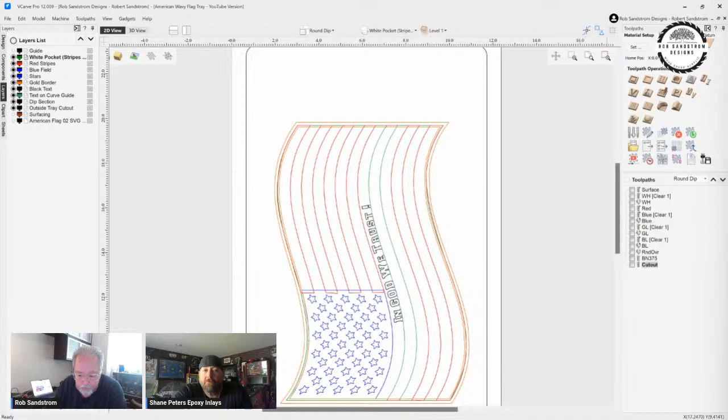Okay, let's start that discussion again. Can you see it now? Yep, all right. I don't have it up anywhere else, but it says my screen sharing. And then let's set up this screen share so that we're both in there. Oh, this is the one I was looking for.

All right, so I wanted to talk about the overlap strategy again, and thanks for letting us know. So the key is that I wanted to talk about where we need overlap and where we don't.

So the first pour, I'm going to get probably easier if I take these all off right now. So the first pour I set up was white epoxy, and then we're going to cut the red out from all that. I'm not going to go through all of this because we did that last week, but there was a question about overlap, and I wanted to reemphasize the overlap concept.

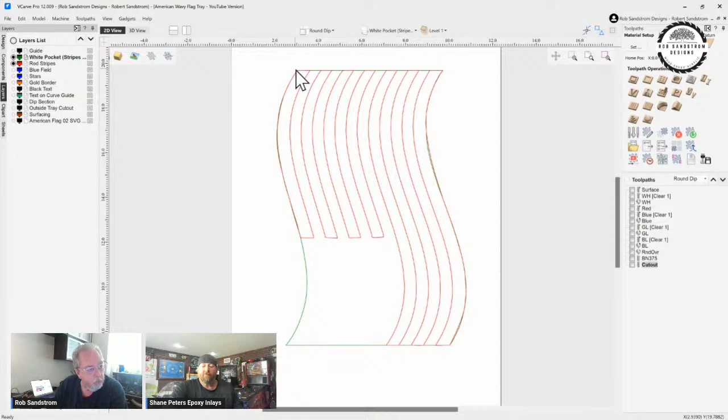So the first thing we needed to overlap is we need to make sure that when we put in the red stripes, that we go all the way out to the end or close to the end of the white. I'll explain that in a minute. So we made all of that come out in this direction because we were going to overlap the red stripes and the white with this gold border that I just turned on. So hopefully you can see we were going to overlap there.

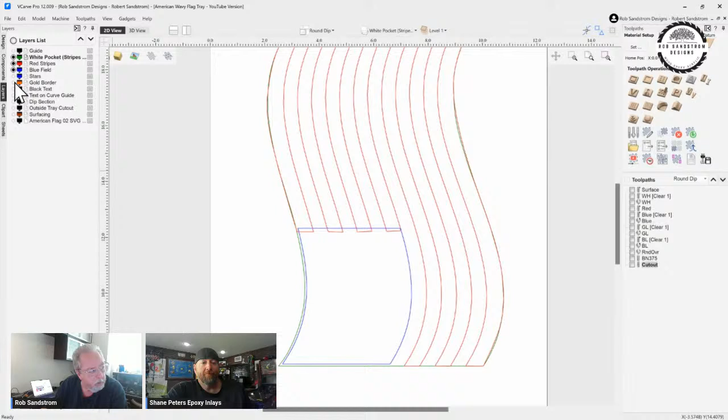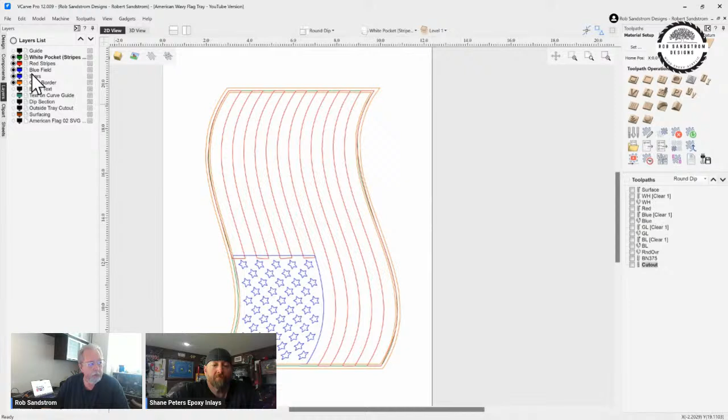And then we put in our stars and did all of the other stuff. So I'm not going to go over all the layers again, but I wanted to point out where we had the key interfaces for overlap. And I think one of the questions that got brought up in this discussion is why do we need overlap and how much?

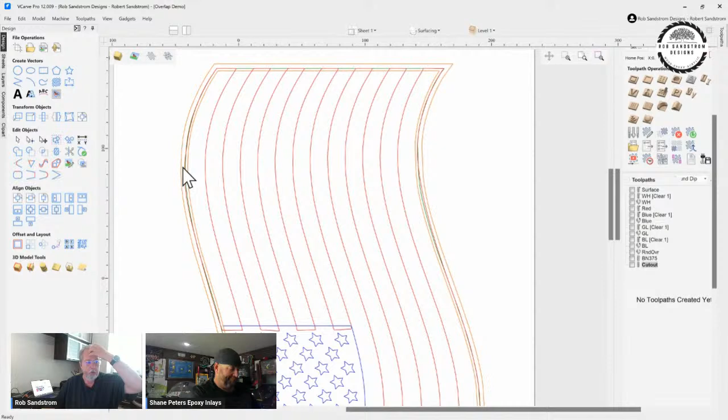And so in that video, I went in there to explain that, but I thought it might be good if I opened up a demo file that Shane and I had done once before a couple years ago. Let me explain what you see here. So this is a 2D view.

And in this view, in this area, these are 15-degree V-bits. So I could probably put down here 15-degree V-bits. And let me shrink that down. Hit close.

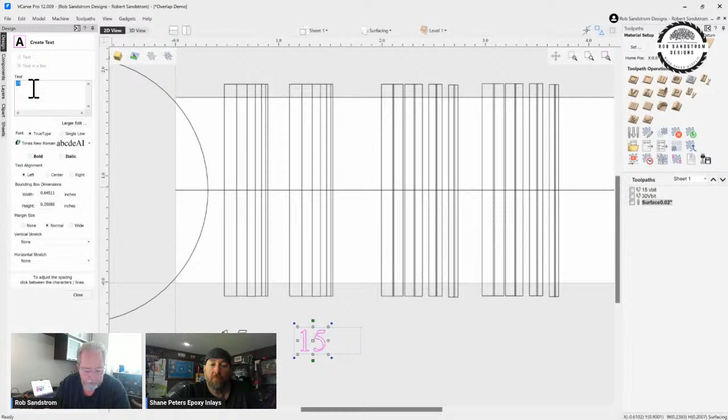And over here, I'm going to hit Control while I move, so that will duplicate it. This is going to be a 30-degree V-bit. Hit close. And so now...

Again, if we take and we go to move this and I hit the Control key and bring it over, it'll duplicate it over here. It's just so we have it. So what you see here is we got a 15-degree and a 30-degree V-bit.

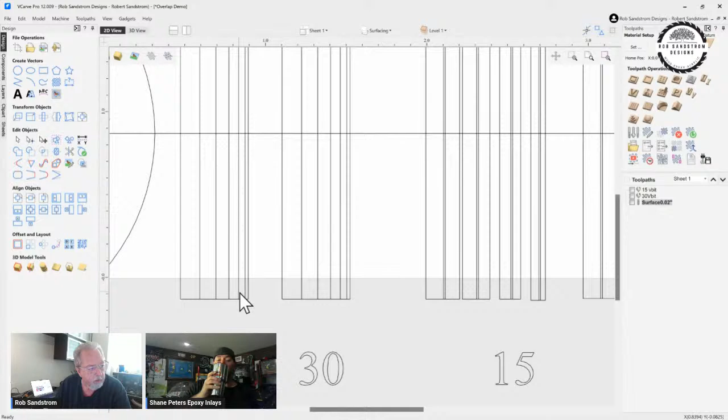And in this version, you can see that each of these vectors starts at 0.02, 0.04, 0.06, 0.08, 0.1, and 0.12 are the sizes of those vectors. And there's no overlap between any of those vectors.

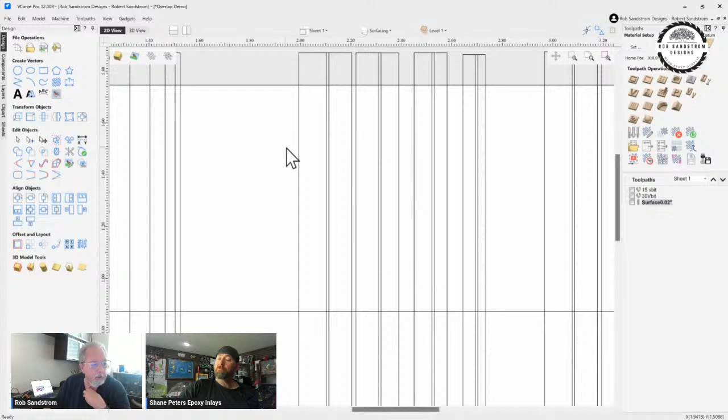Now, if you come over to the other side, what I've done is I put in 0.01 inches overlap. That's a little more than what I had in the video, but I wanted to show it a little bit better. So these are each 0.01. And of course, there's a bigger space right here between these two vectors. I just didn't want them to be piling on top of each other.

So if I come over here and I go to the 3D mode, and we look at it in this direction, I'm going to go ahead and use a 15-degree and a 30-degree V-bit, and I'm going to run those tool paths and show you what it looks like on the side.

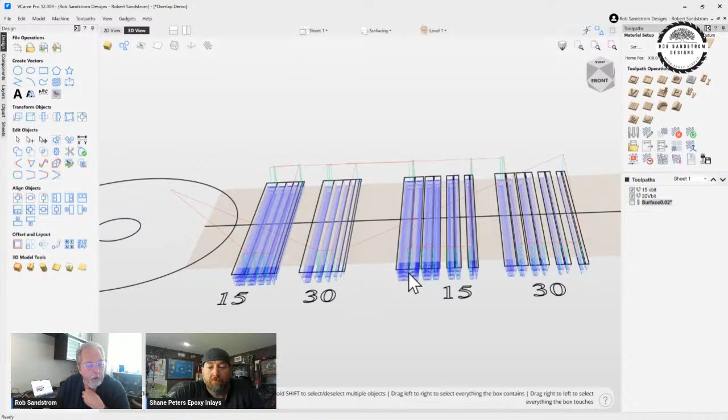And this is where my Mac would have bogged down. It would have taken forever to do that part that I need to work on.

So what I want to point out is the overlap we're talking about. If you look at the 15-degree V-bit on the ones where there was no overlap at all, you can see this peak rises all the way to the top here. And over here, it also rises all the way to the top. And anything under this peak here is wood or epoxy, whatever was underneath there.

If you come over to the ones where we have overlap of 0.01, you can actually see that the peak is lower than the surface of the wood, which means there's less of a mountain here.

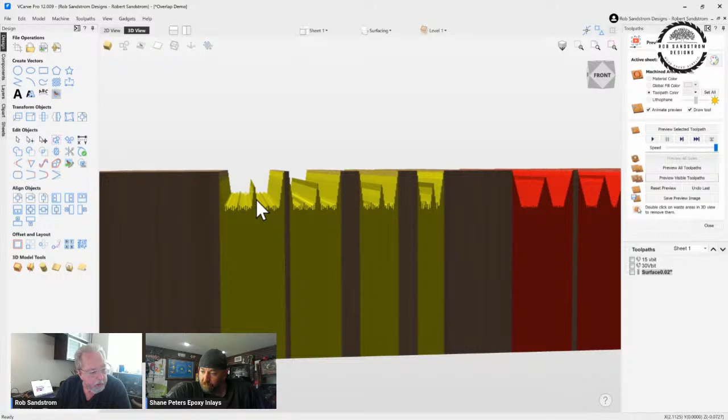And the same for each of these as we go through for the 15-degree bit, and this is the 30-degree bit. So it's much less of a problem with a 15-degree bit than it is with a 30-degree bit, and that's why Shane and I tend to lean towards 15-degree bits, especially if you're going to get into small vectors.

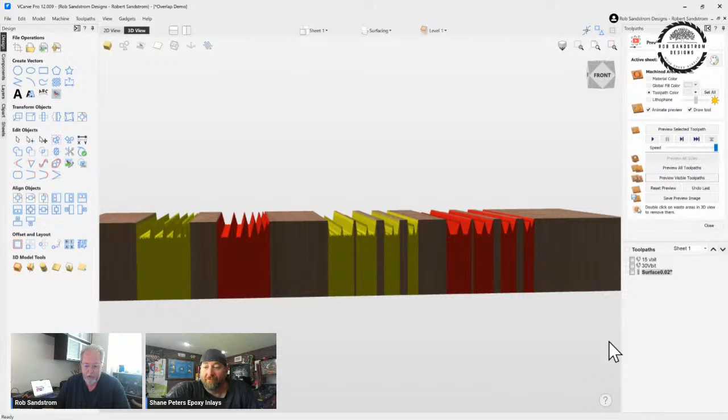So now let me show you what happens if I surface this thing at 0.02 inches, recognizing that that's 0.5 millimeter. So it's not unreasonable to plan on taking off 0.5 to 1 to 1.5 millimeters off the surface to get all your epoxy surfaced off.

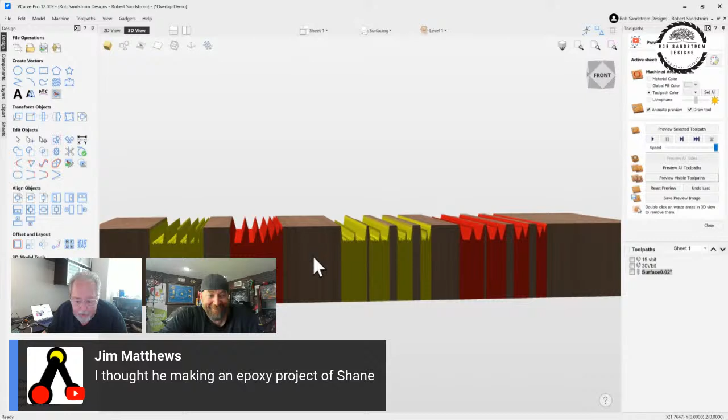I just saw a comment. I thought he was making an epoxy project of Shane. Okay, so I must have pointed to something weird. So I'm pointing on my screen and I can't see Shane. I can see where your screen is. That's weird. How come it's doing that?

All right, so let's go ahead and run that surfacing path. Rob, just so you know, I think he was talking about earlier when you weren't sharing your screen, but you were describing it like here to here to here to here. So I thought he meant because I was pointing here and on the screen. No, I think it was just earlier, but maybe not.

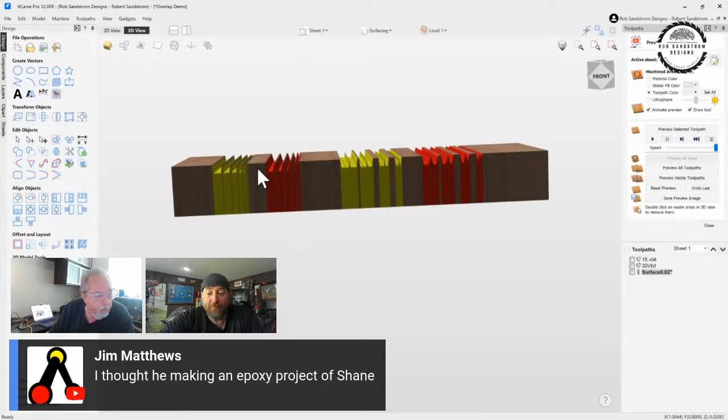All right, so I just ran the milling path, and I want you to look at what happens at the top of these mountains. Assuming this is wood underneath, the 15-degree, it's not as big a deal.

But if I go down any more, you're really going to see wood there. And in the 30-degree, look at how you see the wood already popping through those vectors. So if you put those vectors right on top of each other and you mill down a full millimeter, you're going to have wood exposed between the two of them, or you're going to have clear epoxy or whatever was underneath.

If you go over here to 0.01, you can see that your opportunity - now these don't count because these are intentional spaces - you're not going to have the underlying epoxy popping through. So that is, with a 15-degree, you're really safe.

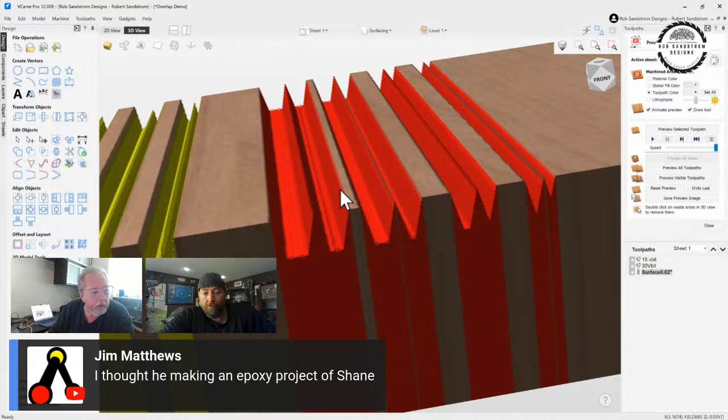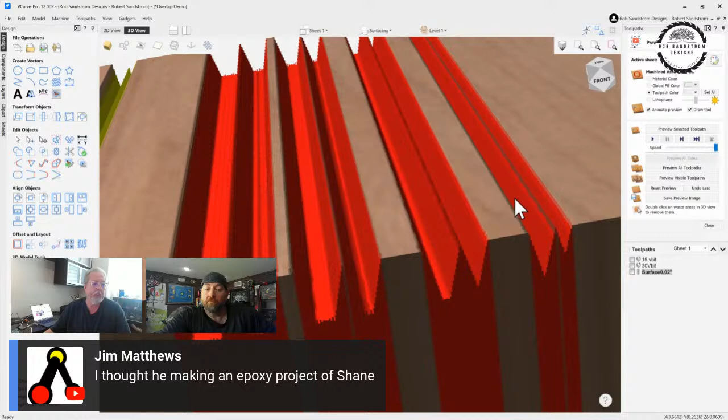And if you go over to a 30-degree bit, you're probably pretty good, although you're getting close on a couple of these. So you may really want to have more overlap, meaning the vectors are overlapped more. Shane normally recommends about 0.05 if you can do it, but anywhere between 0.02 to 0.05 I've found to not give me much problems, especially if I used a clear coat underneath it. So I just wanted to take a minute to go through the actual overlap demo here in case anybody's still struggling with the concept of overlap.

So there we go. Any questions? Or with that, Shane, do you have anything to add or tell me where I'm hosed up? So you did this demo with a 0.01? Yeah, not a 0.1, 0.01. Okay.

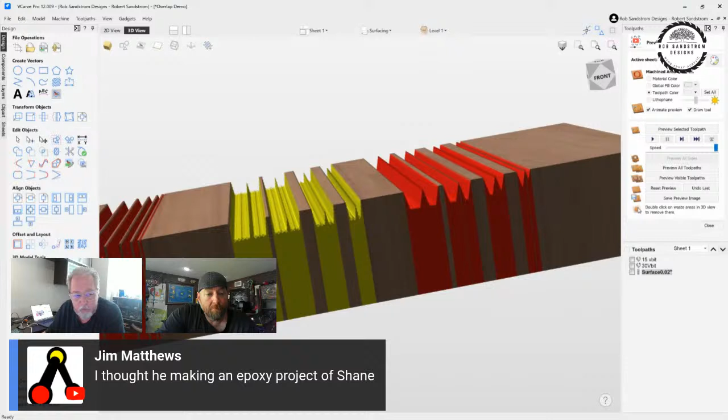And we can see that if we go to these vectors, if we measure it right here and we look between the two vectors right here, right there, you can see 0.01 up there on the left top. So I did that with a 0.01 and we were safe.

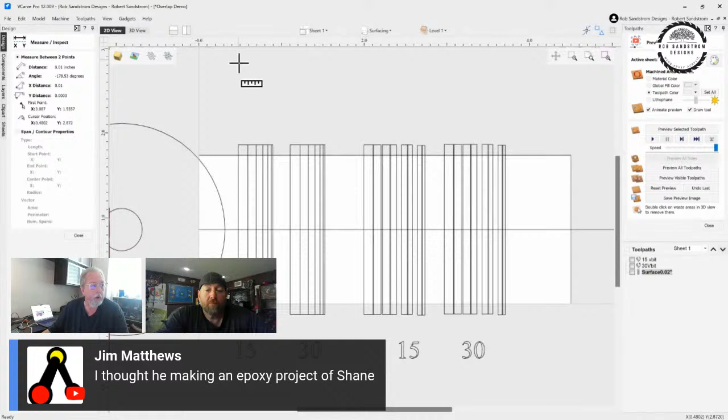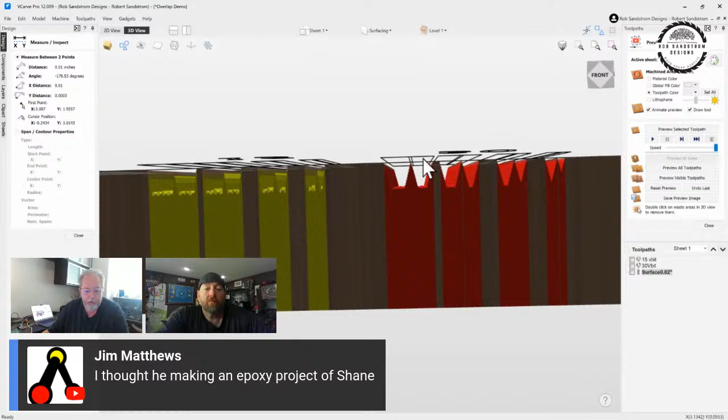The other thing I think probably to look at on this, if I turn on the vectors, you can actually see, if I get just the right angle, this is the height of the actual real surface before I surfaced it. So you can see how far down we went on the view and how the mountaintops can start to get wider and wider as you come down there, meaning they're flattening out and you're seeing them through the epoxy.

And what is that measurement between the original surface and what you did there? How much did you take off with the surfacing bit? What's that distance between this? This is 0.5 millimeter. Okay, 0.02 inches. So I normally overlap at least 0.03, but if I'm in a really tight area, I might go down to 0.02 inches.

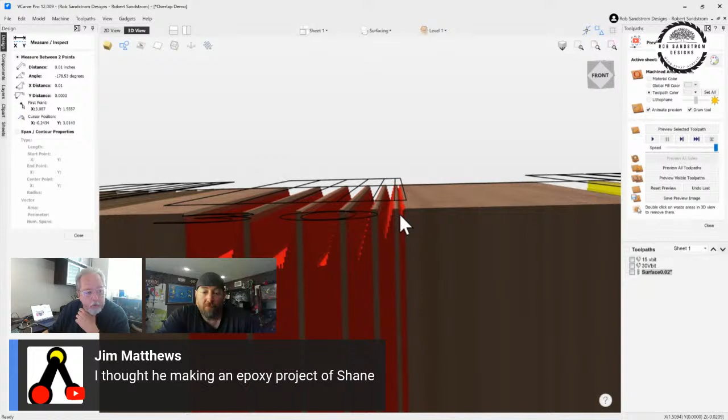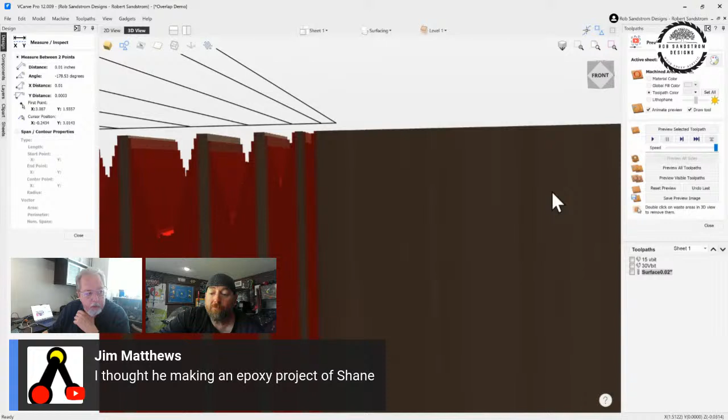So the other thing you have to deal with is the depth of the V-carve. If you're using a 30-degree V-bit, and we looked at this first vector of 0.02, look at that, it almost completely disappeared. That's with a 15-degree V-bit. Let's look at a 30-degree V-bit. It did disappear, you can't even see it anymore. Excuse me, I got that confused. This is a 30-degree V-bit, and this is a 15-degree V-bit with no overlap. You can see how deep it went. By the time you milled it, you've only got that little sliver.

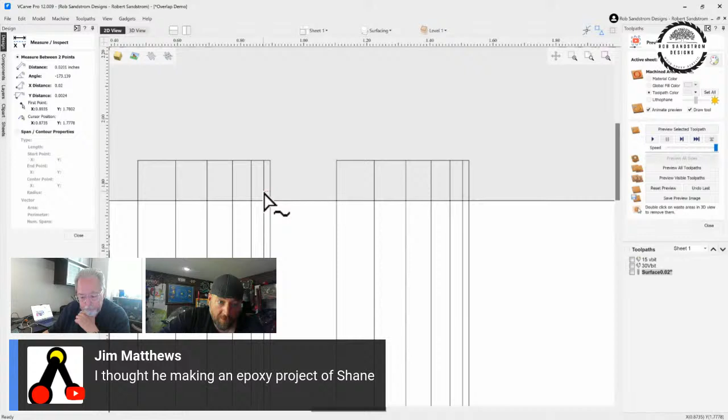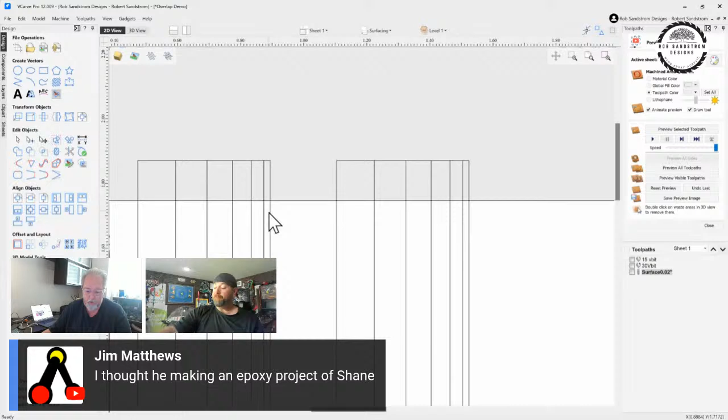So if you go anything more than a half mil for a 0.02 inch vector, and what I mean by that is I'm measuring the vector width. Like if you had in your design and you come across, it's only 0.02 inches wide, when you start getting really small vectors, you have to take care of that a number of ways. One might be to fool it a little bit by starting with a start depth of a little more. So instead of starting at 0 start depth, you might go 0.01 or 0.005 or something, just to give you a little more depth.

That's what you have to do when you start working with real tiny width vectors. You try to make them bigger, but if you can't, you might have to fool the V-bit to start a little deeper. Any other insights on that, Shane?

No, that sounds about right. What I've been doing a lot lately is when I have really small words and things like that, where the little spot, the middle of the A, will be like a 0.005 or something that's left and just wants to break off of there, what I've been doing is flattening the whole project and then just coming back and kind of scratching that in at like 0.03 deep, and then just hand sanding, starting at like a 360 or 240 or 320, to take whatever that last pour was off. Because you're never going to get that 0.125 deep on a real small vector, just like you're showing right there.

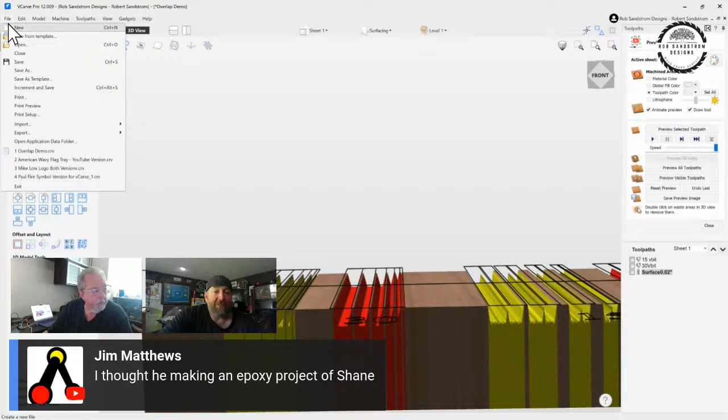So a lot of times I'm just kind of going back in and scratching in what needs to be scratched in after the board's already completely flattened and almost ready to go, except for that last color. And then I go in there, I scratch that in just barely under the surface, pour it, hand sand it, sand up to the high grits, and then it's done. And then your overlap could be a lot smaller than we're talking about.

Yeah, I hope everybody understood what you're saying there. Basically, he's pretty much got it done, and in some cases may have even surfaced it initially, like just flat, but not down ultra flat. And then he can go ahead and do his small carve again and maintain it when he surfaces it. Is that right, Shane? That is right.

I like Shane's idea of using an end mill when pocketing into epoxy. What's that, Brooks, that you're emphasizing there? Let's see here. I thought he was making an epoxy project of Shane.

Can you take my quote down, Jim? Can you take my quote down so we can see the entire screen? Not sure what that means. It's up there right now, kind of blocking, underneath you and I. Yeah, I just put it up there right now. Was it up there before? I didn't really notice, but I think it was. Okay.

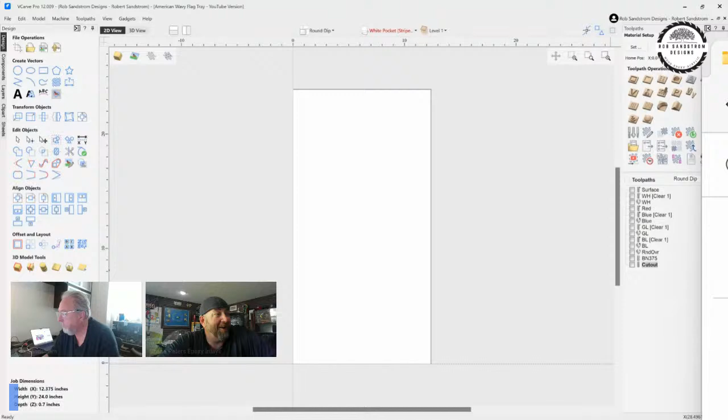Okay, so Brooks, I got what he meant. I thought that's how you did the gold pocket. Maybe I'm thinking of something else. Now I know what you're talking about. Let me take that down. Let me put the vectors back up real quick. I don't need the guide. All right. So I do know what you're talking about now.

So what you're talking about, Shane, Brooks, is when we decided to use a regular end mill for the red stripes, because we were cutting right into the white epoxy straight on, so we didn't need to use a V-bit. When I did the gold border, I did use a V-bit, but I probably could have gotten away without it because I was gapping both sides of that. So I could have used an end mill for that, and it wouldn't have been a problem.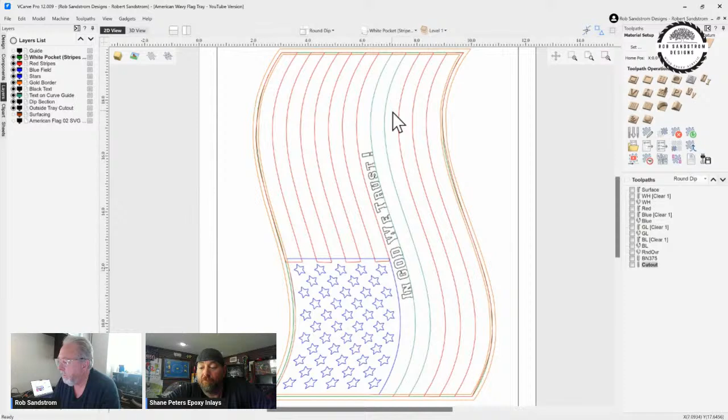But you would have forfeited your sharp gold corners, right? Yeah, that's the problem. You would forfeit your sharp gold corners. That's not worth it. Use that V-bit. So that's why I used the V-bit, or in my case, the tapered ball nose that I substitute for a V-bit. All right.

Picture of the boards I am doing. Shane, is Brooks asking for a picture of what I was talking about? I think so, because you said it's doing so well. I think they're just interested in seeing what the boards are that you're doing. Yeah, let me grab one. Do you have a picture you can share on the screen, or just? I'll just bring it. Okay.

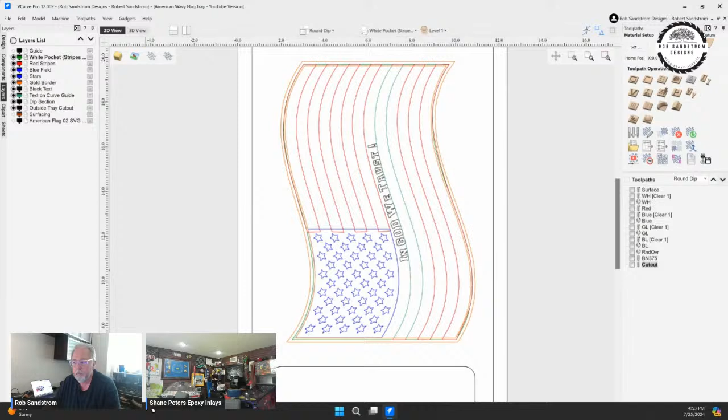Hold on. Let me see if I can make you big, buddy. I'm trying to. I can't get my cursor to go in the right area. All right, you're big. You're big. All right, so they can't hear you. You're muted. Sorry, my dog's barking. Sammy, stop it. I was muted because of that.

Yeah, these are the boards. Just insane. There's been a lot of sports teams and things like that, like the Niners, and the Dodgers are a huge seller, I don't even know how many I've done, but this is absolutely insane. I've never seen anything like this. So how many boards do you have on order? You were telling me the other day, and then you got like 20 more after that. Yeah, I've maxed it out. I was only doing 47 of them. They'll all be hand numbered, and that's maxed out.

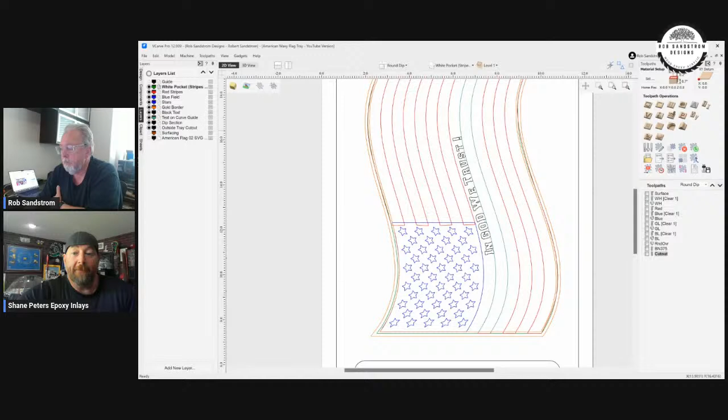Yeah. Well, you priced them actually pretty reasonable from what you told me. Yeah, I did. Just because it's just such an easy inlay, you know. Just 2 colors. I mean, I can't even think of any other 2-color inlays I ever do.

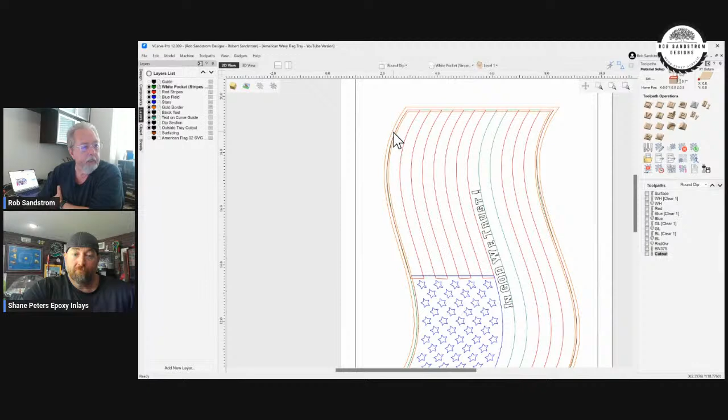So the other thing I thought I would talk about is when I did this inlay, let me take down this gold for a second. And well, let me put the gold up. And if I come in here, what I wanted to show was the overlap that was going on between the white and the gold out here. And if you measure that, you'll see that the overlap I had between the white and the outside border was 0.13 inches.

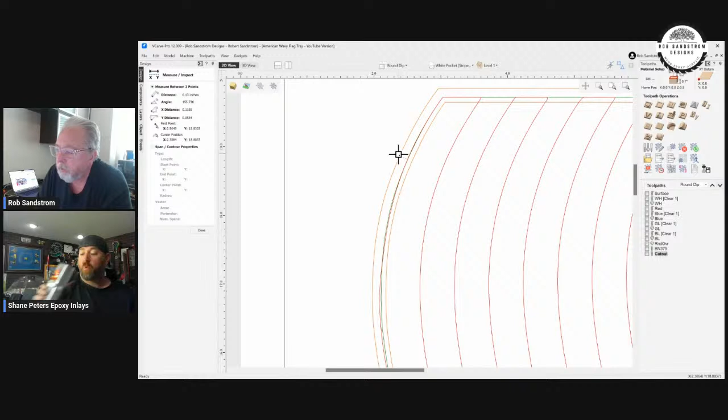And the reason I went out that far, and this may be what Brooks was talking about also, is because I wanted to be able to use the clearance bit of an 1/8 inch end mill. So it was still a V bit so I could get the square corner up here, but I wanted to be able to clear it out with an 1/8 inch end mill, which meant that everything in the gold, coming across, had to be greater than an 1/8 inch. Right? I think I even went bigger than that, huh? Yeah, you went like a 1/2 inch.

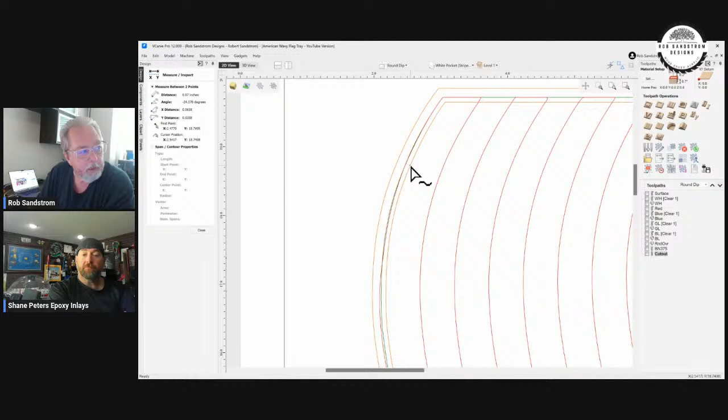Yeah. So do you have your picture? And so if you go on the inside, you'll see that's at 0.07 inches. And we said 0.05 is his normal number. So we had plenty of overlap with that gold border. And so the way we did it was we poured all this white. I already mentioned that before. And then we did the red stripes.

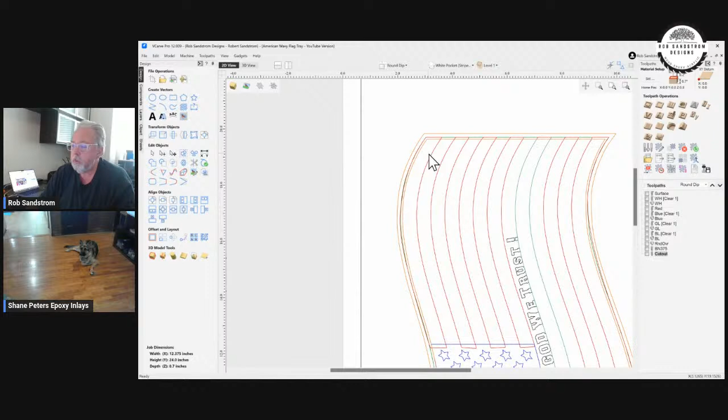Now, if you wanted to do it a different way, we could have done the overlap so that the white was overlapping into the red 0.05 inches each time on the top. And then when you carved it, it would come down to the right size. We could have done it that way too, but this was easier.

Hello. Did you have a picture of your version of the board, Shane? No, I only have one for that flag I did. I think I sent that stuff to Jessica and she posted it for me on the Instagram. But I saw it on the Instagram. Yeah, I can try to. Let me see if I could find it here. All right. Any other questions on this board? And he'll be looking for that other picture.

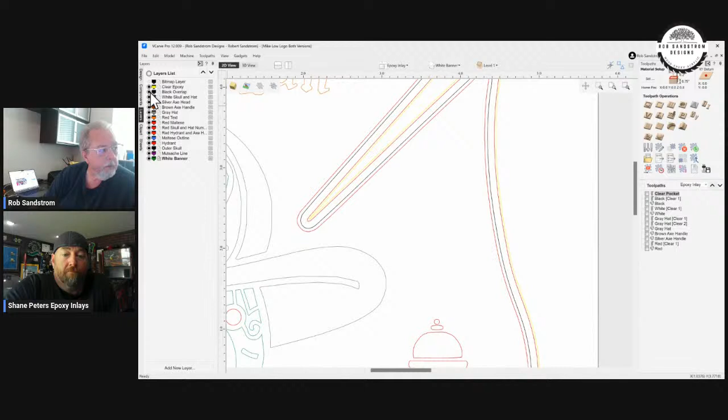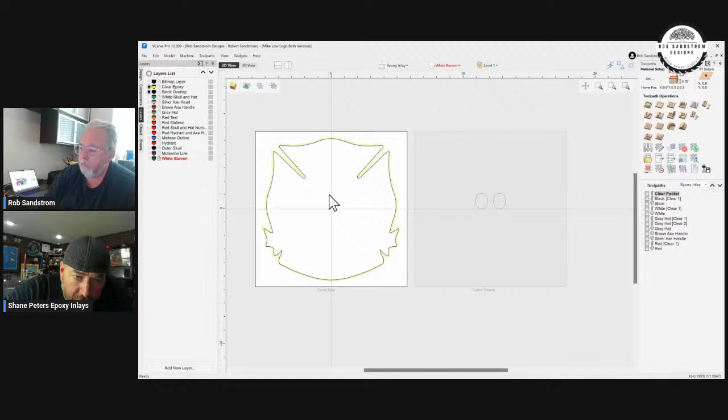So in the vectors for the epoxy inlay, the plan is I'm first going to pour a clear pocket, if I back all these things out. Is that the yellow line? Yeah, you can barely see it, but that's a yellow line. That's a clear pocket. That's the one I'm going to pour first. I'm still debating whether I go in like a 1/4 inch, because the next pocket I'm going to pour is this black, and it's going to be all black. So that eliminates all my overlap stuff except in one area, and that's going to be the red.

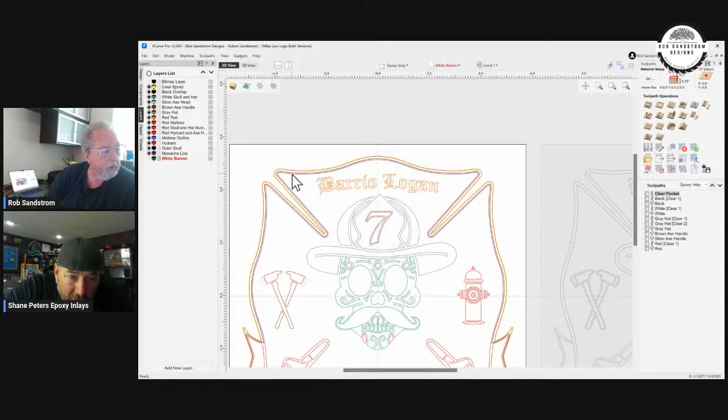All right. So now when I put the white skull in, you see I'm carving all of these things directly into the black. And then the last one is the white banner. So the only place where I needed overlap was right here in the red, where the red's overlapping the black. Because if you remember, this is how the logo looks. This is actually supposed to be red. It shows white in this picture, but it's supposed to be red. So that's the only place I needed overlap, because everything else is going straight into the black. So that makes a nice clean vector, and I didn't have to put a lot of extra work into the vectors.

If we come over to the V-carve inlay, over to this area, you'll see I had to add a whole set of vectors around the outside here. And it wasn't just a straight fit, because if I did that, the other problem I was having was this mustache was curving all the way in, and it was looking bizarre having the mustache hang in there. So what I wanted was the mustache to stick out. So I had to rearrange these vectors in a more complicated way than I did with the epoxy inlay to get that carve to look right.

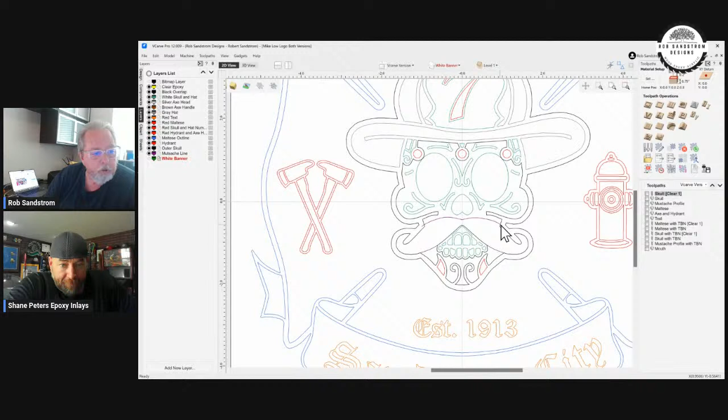And then I had to fake it out by putting this line right here. That allows me to do a profile toolpath with a V-bit that will make it look like it's part of this pocket. Let me show you what I mean. I'll just go ahead and preview the whole thing.

So you can see what I did with the mustache is I had the pocket around it, and then I put the V-bit in this way to make the mustache stay proud. And the other concern was that when I had the mustache carving it in, when you got right in here, this was a really thin bead. It could have easily chipped out.

So the way I had it originally. So this is how I did it to fake it out. And I think it's actually looking pretty good if you ask me. Yeah, it looks good. Any thoughts? And Kurt talks about how he numbers his toolpaths. Yeah, we have to number our toolpaths with the bit that we want, the end mill or V-bit, whatever it is we're using, so we can differentiate it on our handheld controllers.

All right, any other questions then? I just wanted to lay that out because I'm getting ready to put together a video in that area because people have asked me to do that, and I'm just trying to figure out how to do that in a reasonable time so it doesn't take forever to lay out those vectors.

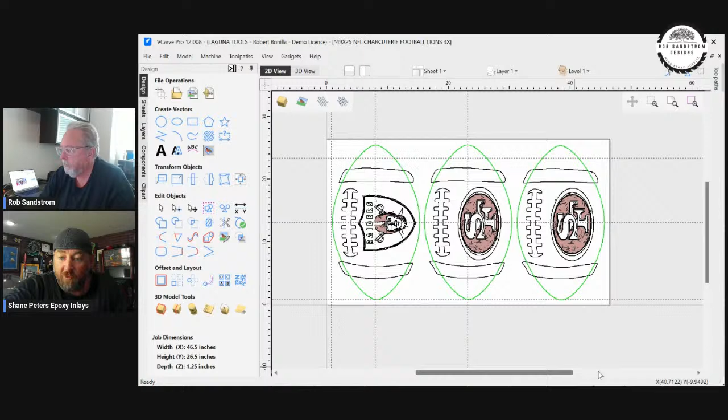This is actually a really big project. It's about 4 feet wide and a little over 2 feet tall. That way I could get 3 at a time of these 2-foot charcuterie boards with the NFL logo inlay. That's another big thing that's selling. So let me go over here to my toolpaths. Can you guys see that? So you only see the first 6 letters. So I put this in here for myself at the end, but this is really all I use. And I almost always cut 2, then 1, then 4, then 3, then 6, then 5.

And what do those numbers stand for, Shane? Explain that to people. So the very first one is the FB. Because I have so many files on these drives, it lets me know I'm talking about the football deal. Although lately I've been using different thumb drives for everything, so I don't get confused. So that lets me know the order that I'm cutting them. And that 15 is a 15 degree. The 14 is a 1/4 inch. The 18 is a 1/8 inch. So then I just know on the machine what I'm doing.

And I almost always run my clearing path last. So I run my V-bit first. People ask, why don't you just number them that way? It's just because the machine puts them out this way. So I just track it where I run my V-bit and then my clearing afterwards. I'm sure guys have setups where they can make the file name as long as they want and not even have to worry about doing this. But once they limited me to just 6 digits to see on the handheld controller, I had to figure out a way to know what the hell I was trying to cut out there each time.

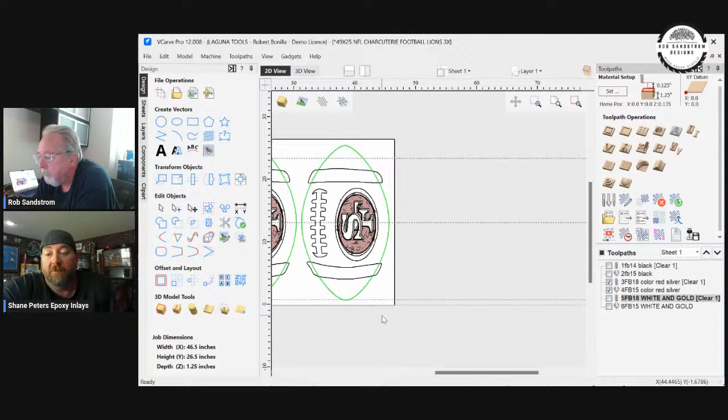I'll take all of those ones that were on my screen and shift those over. And I had to abandon that once I got into boards with 30 or 40 colors in them. So I had to quickly go off of that and just set it up correctly and run them in order how they came out, because there was no way for me to keep track of the colors once I got past just a few.

Yeah. And like Shane said and Mark said there, in general, I run my V-bits first. There are occasions where I will run a clearance bit before I run my V-bit, but 9 times out of 10, I'll be running my V-bit first. Yeah, you get pressure on both sides of the V-bit that way. It's a lot cleaner. You don't have to worry about things breaking off and chipping.

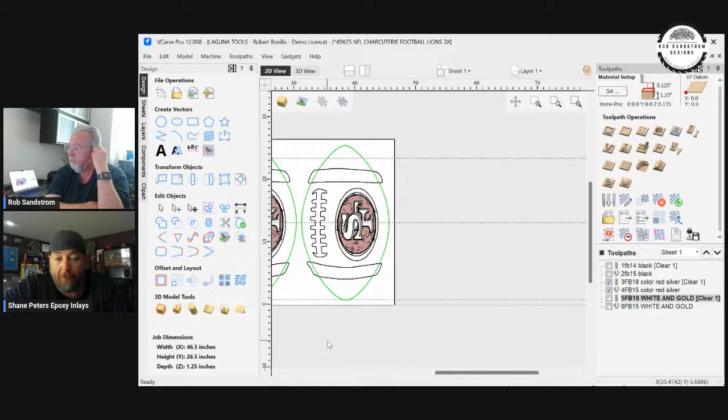And let's see, any other questions in here? I don't see any empty questions. Anybody have questions for us?

I did think there might be something of interest. Let me show you something real quick. I'll do a share screen again here, because I started to share it before and I didn't do a very good job of it. And one of the questions that gets asked of me often is because I used to manually run the surface on each of these. In other words, I would manually hold my controller and run it. And people ask, do I ever program it?

I decided to go ahead and develop a process for myself that makes it easy for me to program each time I do a design. It just depends on the board. So let me show you what I do. So this one you see doesn't have a surfacing program in it right now at all. Nothing in here. So the first thing I do is I've got a file saved that's a vector.

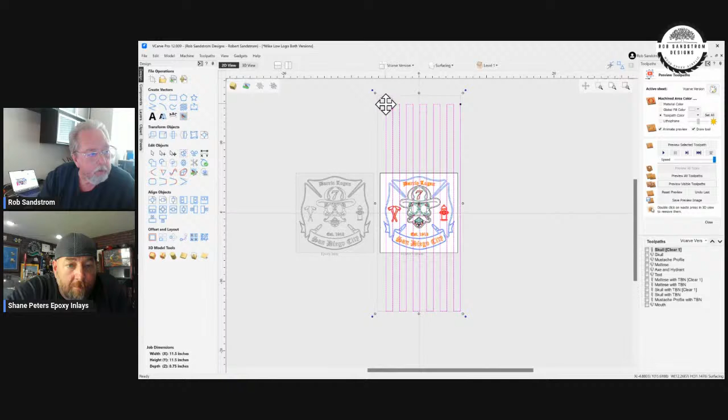You can see when I look at that, let me get all of this and group it for a second. I'm going to hit G for group, and then I'm going to hit center across the material. And now you can see that I've got this bit centered across the material. And I'm going to ungroup now, hit U for ungroup, I'm going to take my 2.5-inch bit, and if I just move it straight down, hopefully you can see that, it goes right over the edge of this wood, okay? And so I'm in good shape going down.

And I didn't mean to take the whole thing down. Apparently I grabbed it. So I'm going to hit Control Z and let it go back up. I didn't mean to grab this part and that part. I just wanted to grab the bit. But you saw the gist of it. It comes straight down. Now I'm going to take this bit and I'm going to move it out of the way. And I thought I had that grouped, but I didn't.

That's okay. And now I've got this coming across, and my bit, I'm going to group this again, hit group. My bit, as I said, is 2.5 inches. So I'm going to move that right down here. I don't want burning, so I don't want it sitting over the board. So now that I've got it sitting here, I can take this part here and go to node edit, hit N.

I can come over here and I can come straight down till I snap right there in the center of the bit or very close. I can go over it. That's okay too. But if I wanted to get it just at the right spot, I can go right to here. And I know that when this bit comes up and turns, this is a profile cut path, that it will be not on the board. It won't be burning the board. If I come down and I do the same thing now.

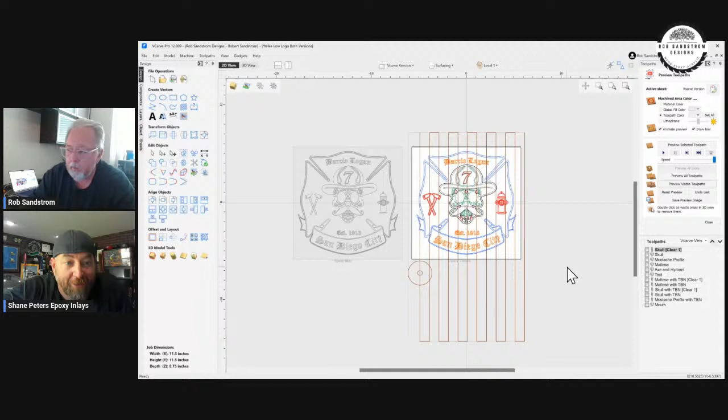I always watch my machine. Me too, and that's why I just say, well why the hell am I programming anything if I'm not comfortable enough to walk away anyway? Because the reason I program it is so that if my hands slip on the buttons, I don't end up with a problem. Got you, all right, so that's why I program it. So I'm going to go back to node mode here because I've had my hands slip, they're not as strong as they used to be.

And Carrie has a question too. All right, if we get to it in a minute. Okay, just a second, I got confused talking and chewing at the same time.

So normally this is all grouped up, but I think I accidentally ungrouped it before when we were talking. See, it's going up there and it shouldn't be. I'm going to do this side here. Something happened there, so I'm going to bring it up like this. If I hit the Alt key, I wouldn't be doing that.

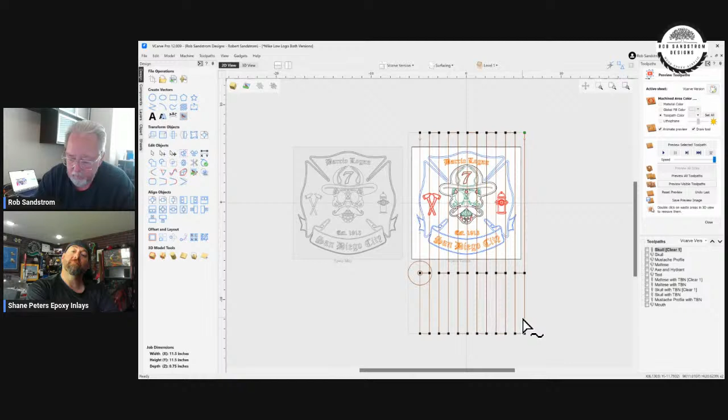See, I can't talk and chew gum at the same time. Already you guys are so smart at CNC, you understand this stuff so good, but the amount of time that would... no Shane, it doesn't take that long. You know that meme with the black lady that said 'ain't nobody got time for that,' that's it, my brain just does that automatically once I spend four seconds in it. So they don't have to do this, but I'm letting them know why I do it. All right, I'm just busting your balls. I don't want to take a chance.

So now I've got these adjusted on both sides, and then I come over here and I cut this one right here, and then go out of node mode, delete this vector, and now this is going to go back and forth. It's a lot easier to do when I'm not talking and trying to answer questions in the middle of it.

So you come up here and you see I'm on this side of the board. This board is only 11.5 inches by 11.5 inches. I've got plenty of room over here, plenty of room on the left side. All I have to do now is come over to this toolpath.

Let me get this out of the way. I'm going to come over here, select a profile toolpath, grab this vector, and go down. I like to go down 0.5 millimeter at a time, so I'm going to start with 0.02. I'm going to select my Dragon Slayer bit.

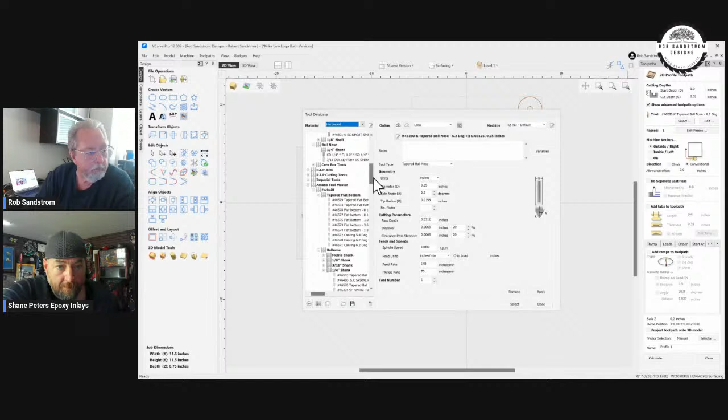Dragon Slayer, what's that one? Slab Slayer, same thing. Oh okay, gotcha.

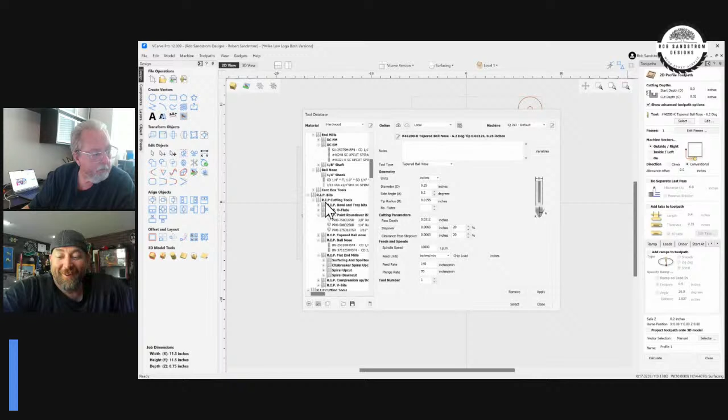Oh, you guys been married long? Yeah, because we've been...

I don't think that's the right bit, but that gives you the idea. For some reason, I should have practiced this one ahead of time.

So now I've got my bit here, and what I'm going to do is calculate it, and I have my surfacing path now, and then I can just go ahead, preview visible, see if it works right, see if that bit was big enough. No, I picked the wrong bit. See, it still got my tapered ball nose.

Well hell, well this could be another reason I don't program, because I've never added a tool into my stuff. I just kind of went with what's in there, so I wouldn't even know how to. Remember, I'm not on my normal computer, so it's not set up the way it normally is.

Oh no, I wasn't busting your balls, I was saying that I don't think my database even has the 2.5 inch slab bit. I'm busting myself down. I didn't go through this real good, but this can be very embarrassing because I thought I had them all right here, and this is a different computer, like I said.

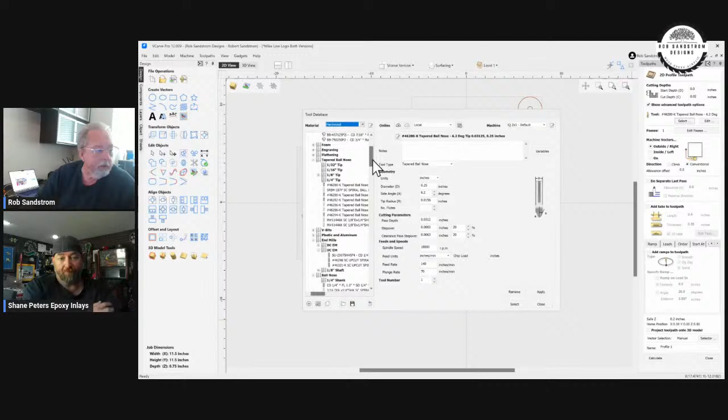I'm not as good as Mr. Lindsay is at thinking under pressure when I get this stuff going. I should have checked out this tool database on this other computer. It's the tool database isn't up to speed, so I'm in trouble. It doesn't have the spoilboard bit in here that I thought it did.

John put what we can do on there too, and I just made a little joke, but I'm sure some people weren't around in the very beginning when I started all this, and I'm still the exact same. I know about 8 or 9 of these buttons on VCarve, and I had figured out a way to master this whole thing, and that's all I know. So outside of that, importing tool registries or whatever that's called, I just don't.

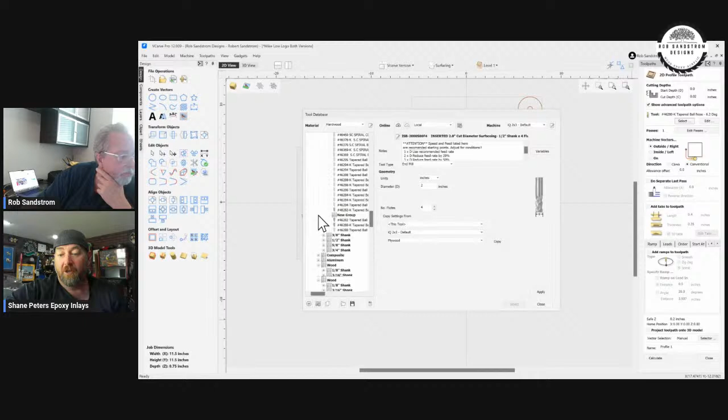Do it. And then Rob is always really good. He says, 'Oh, there's a YouTube video on this, let me send it to you.' And he sends it to me, and I was like, 'Oh man, that's 9 minutes long, I just don't have that kind of time.' So I'm still stuck in 2017,

but I'm able to just produce highly advanced inlays, and that's about it. Yeah, you can see that this is a November 22 import on the bits that I have. So I think this is the right one finally.

And we'll hit calculate now. Now I'll change the tool path to this color so you can see it. Hit preview visible. That might have been that little ball nose again. No, looks like it just scratched down your board and made it yellow.

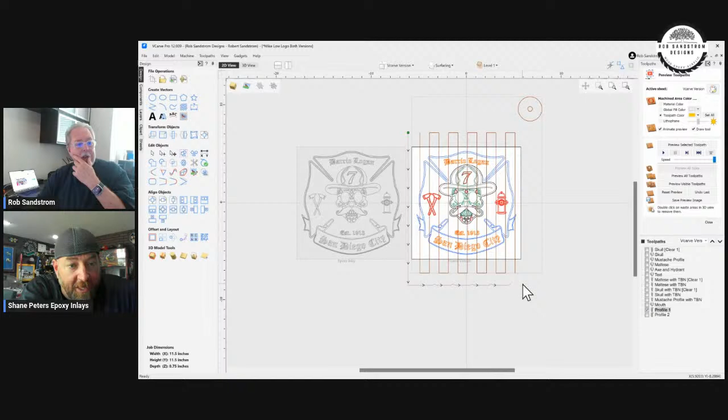It's going around. These are not joined. Something happened. Can you join those with one click right there next to join vectors? Something happened when I was doing the ungroup and group thing.

Down. Yeah, right. No, next one over to the right. Just right. No, next one over to the right of that one, just by one. Click that. Yeah. Now are they linked? Well, I don't know, we're going to find out.

It's an open vector. It should be open because it's one open vector. So it should have. It's not going to close them because it's not a closed vector. I have to go through here and check. Oh, I see. Okay, so you got to just highlight the nodes. Okay.

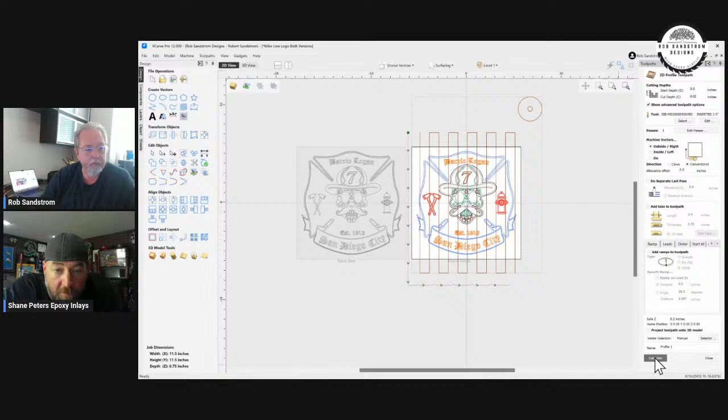Yeah, I've got it so that it's not working right. I did something with the grouping up here. So, folks at home, don't drive and talk at the same time. Sorry, I'll have to go figure that out, and I just don't want to take everybody's time.

Shane, answer questions while I look at this. So let's see here. There was one back from Kerry. It says sometimes vectors get really close and overlap each other. When calculating tool paths, you get overlap errors. Then I have to move the vectors. Now my overlaps are under the 0.01. What can I do?

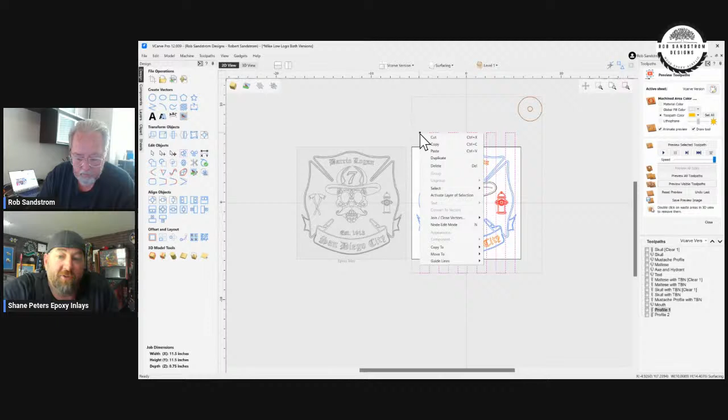So I've always just ignored whatever thing VCarve is telling me those errors. I just ignore it because I know that the first thing I do when I create each layer of colors, I search to make sure there's no open vectors. If there are, I make sure they're either deleted or closed or whatever. So I know if there's no open vectors and I have it set up right, whatever this software is telling me is just wrong. It always works out perfectly. So I really don't know - that's probably going to be a question Rob can answer. He would have put the time into actually checking what that error is instead of just believing you're better than the machine and ignoring it.

Okay, here's my error right here. So everybody come back to this. I, instead of putting it on the vector like I was supposed to, hold on.

Hey baby, how are you? Good. Hey, shut up.

Is that Rob? Hold on, did you guys hear me tell them to shut up? Yeah, I was going to mute you, but it's too late now. No, they're my grandkids going crazy, and I just don't have the patience sometimes to say it nicely after I've told them 500 times.

So anyway, I'm coming back to here. Instead of being on the vector, I was outside the vector, so it's coming outside this way. Does that make sense for everybody? Yes. So now I'm going to hit calculate.

If we look at the vector now, you can see it moving along the vector. Hit close, and then I'm going to go ahead and preview, and then preview visible. Now you can see that it's doing it all by itself, and I can't possibly slip with my fingers, and that's why I do it.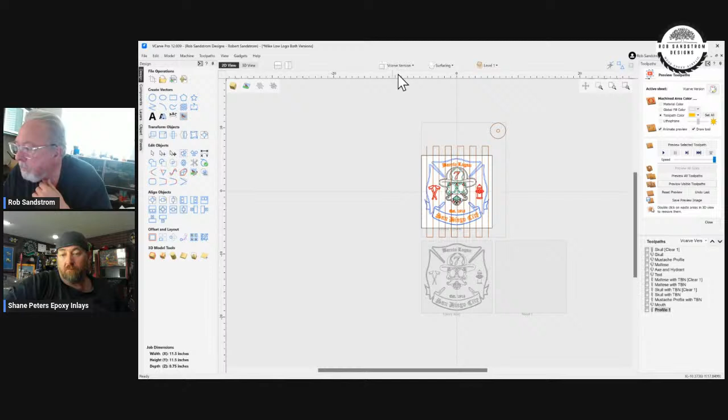Okay, yeah, that's what he meant. So let me show that real quick. I can show you what you're talking about. I'm going to come over here to the layers, turn on the bitmap, and take this bitmap and copy it over to this new sheet here. Well, I wanted it on sheet 1, but this will work.

So if I'm going into this sheet here and I've got the bitmap, I go in here to the design, just like he said, and do a bitmap trace, then hit preview here—I'm not going to take the time to make it all pretty. So now if I come over here and hit close, and turn off the bitmap so I can see what it ended up like, you can see all of these layers are all fuzzy.

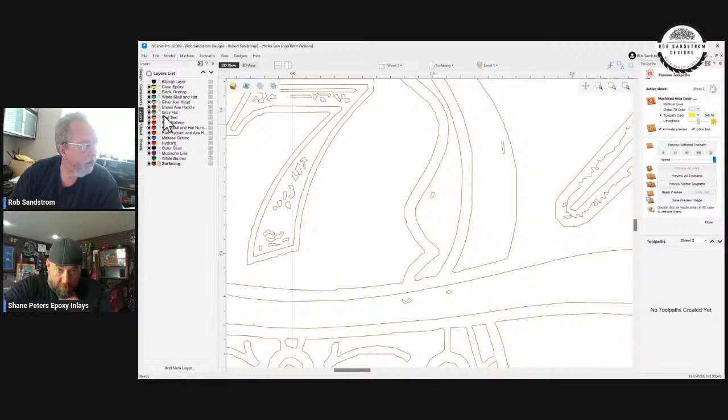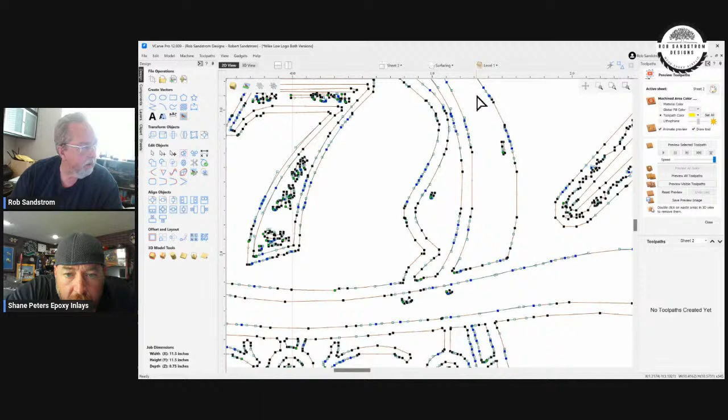I think that's what Kevin's talking about. That's going to happen all the time, and I haven't had anything except—even in here, if you look at this, let me turn on the nodes. You can see if I click here... do you want to ungroup the selected objects? Yes. So if I look at the nodes, you can see they're all squiggly. That is not going to carve well at all.

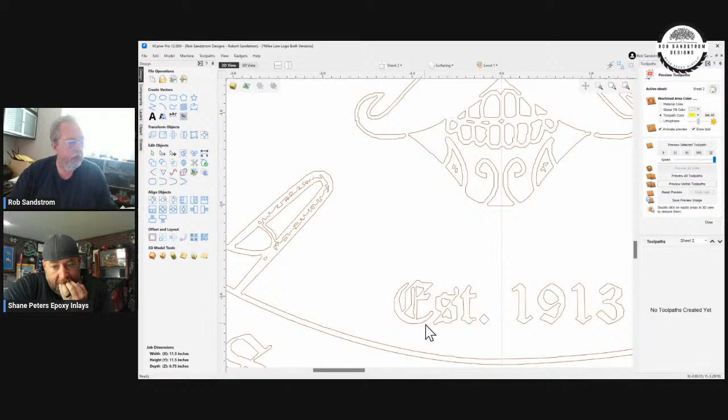No, so let me turn off the nodes. You have to go in here and clean all these up, and that's where there's tons and tons of work. Depending on how you want to approach it, for example, when I did this one—I don't have time to go through that here, but I will go through it in the video I make, and try to do it in an expedited manner. You're going to have to basically go through each of these, let me just do this one real quick. You're going to have to come in here and take out things like taking that node completely out.

Hit D to take it out. And then you're going to take out probably this one here. D. You can't just highlight those and turn them to smooth? I'm highlighting more of them, turning them to smooth. That's what I just did. I took all those. That's one option.

The other option that I first do before I ever actually do that is I take them all and I use this simple curve fit curves to selected vectors. I use 0.004 tolerance. I make them Bezier curves and I max angle 60, hit preview, and you can see how it reduced the number of nodes already. Hit OK. And now you can see that there's more smooth nodes and there's going to be less cleanup that I have to do.

And I would do that all along here. Watch all these nodes. Hold on, leave that part of your screen on there. I got to take a picture of that. Hold on one second. Hit preview, and you see how all of those just reduced tremendously. So now I have less nodes to clean up.

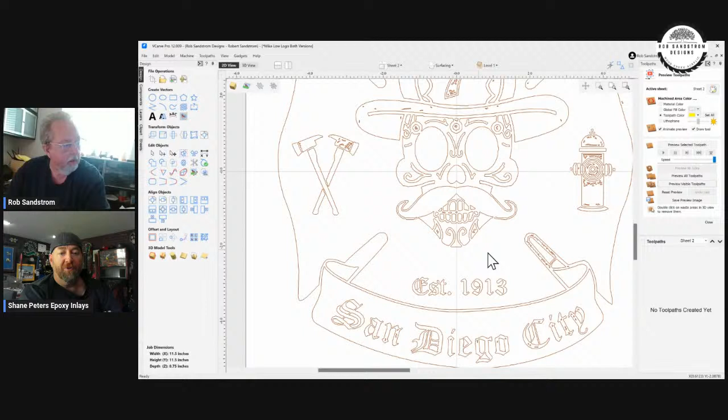Too much there, because did everybody see what happened there? Yeah, you lost the axe. I deleted the axe head, so I didn't want to do that. So I'll delete these, then I'll delete these. I'll delete this one, delete this one. And so I'll go through and I'll start cleaning up this whole thing. You lost your middle piece there. You want to do the same thing, but you want to select that middle, right? Don't you want that middle? Hit Control Z.

Hello? Can you hear me, Shane? Yeah. Did my screen go black? Yeah, your screen's there, but I don't know if you meant to do that. Were you supposed to keep that little piece that was inside there? I could, or I could just get rid of it. Either way. But what actually happened was all three of my screens that I was working on just went black.

So yes. So what he's saying is I normally wouldn't have deleted that. I'd come back and undo it. Well, you can also, instead of having to do 3 or 4 moves like that, you could still select all that and then just shift and click those 2 pieces, and then that would unselect them, right? Yes. I think you're saying like do that. Yep. So anyway, the next step is I go through and I clean up all of these little goobers. And then as Shane suggested, I will offset this one.

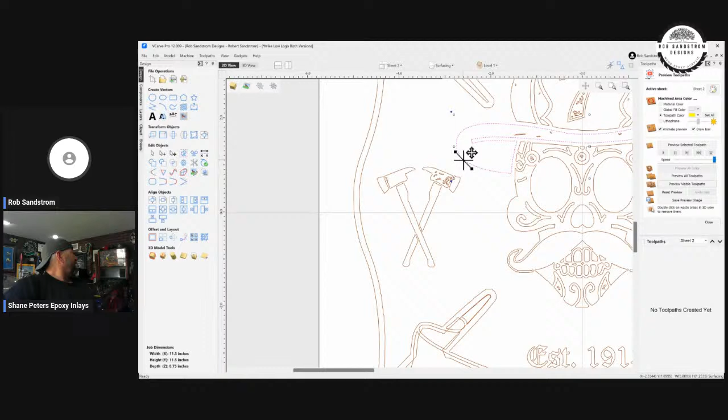And of course, I'm going to clean it up. And then I'm going to start into the individual nodes again. I'm going to come over here, close this. I'm going to use this tool. I'm going to hit preview, see how many nodes it got rid of. Hit OK. And then I would start cleaning this up using these nodes by simply adjusting these individual vectors where I need to. And that's where it takes some time to get used to.

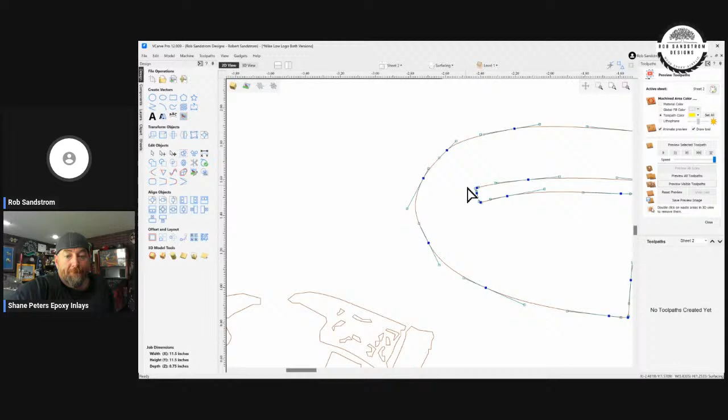For example, these two here, it didn't smooth out. I would have smoothed those out. And in fact, I would have taken this one out completely. Then I go hit smooth again. And now we have a nice round hat there. So that's the idea. We would just go through and we would clean all this stuff up.

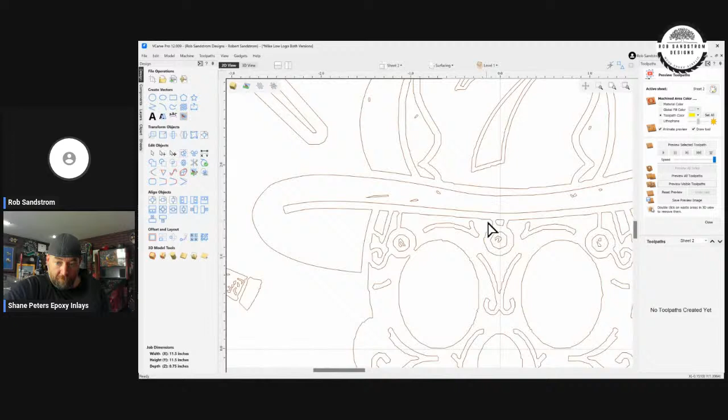And watch what you select, because you never know what you're going to take out, but you can always do the undo. So I'm going to go through and clean up all of that, and then I would have everything done. Now, I will say on these, you're not going to clean these up the way you want them. So what I do for this is I actually come over to this circle tool.

And I just got a warning. My laptop looks like it's just about out of battery. So if I drop off, that's why. It wants me to plug in, but my charger's over on the other part of the house.

So I basically grab the circle tool and I bring it so that it matches this shape here. And so now I've got that done. So then I'm going to hit the control key. It's in move, right? I'm going to hit the control key and I'm going to hit alt. Apparently I hit the wrong key. Hit control Z here again. I'm going to start moving, hit the control key, and it'll duplicate it. Hit alt. It'll bring it straight across, and you can see that they're out of alignment already a little bit.

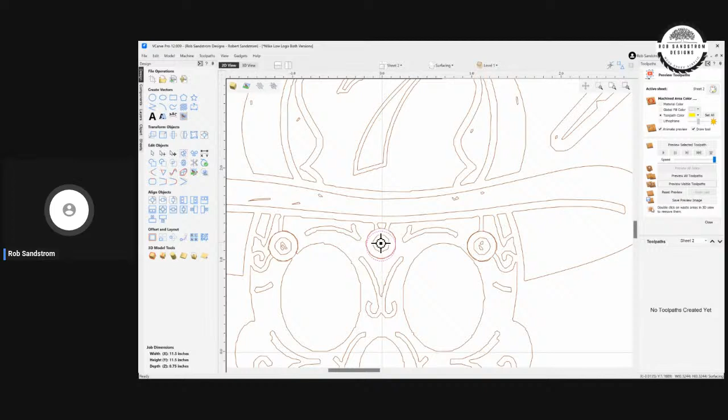Hit control again. Come across. And now I've got these circles here. What I would start doing is adjusting each of these vectors so they fit just perfect the way I want them. And since I know it wants to be up a little bit there, I'll go over there. And then I would change these vectors to the red section. So as you see, I just keep going through it.

Same thing with the eyeballs. Try to get it in the center. Get it close. Hit node mode. Bring it up over here. Bring it over here a little. Here. Bring it down. And now I have that. Take it out of node mode. Hit the control key. Bring it over. And now I've got those eyeballs.

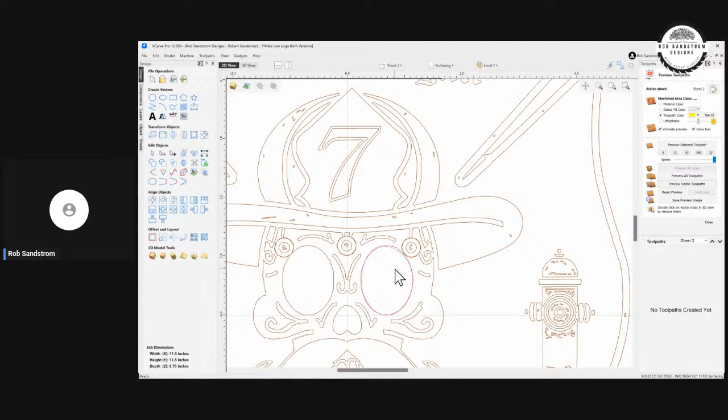Looks like it didn't copy again. For some reason, it's... there we go. Well, it's not working. Normally, if you hit control and bring it across, it's a copy. There, it worked that time. So then I would go in and I would delete the jagged vectors. Hit the delete key, and now I just deleted those jagged vectors around it.

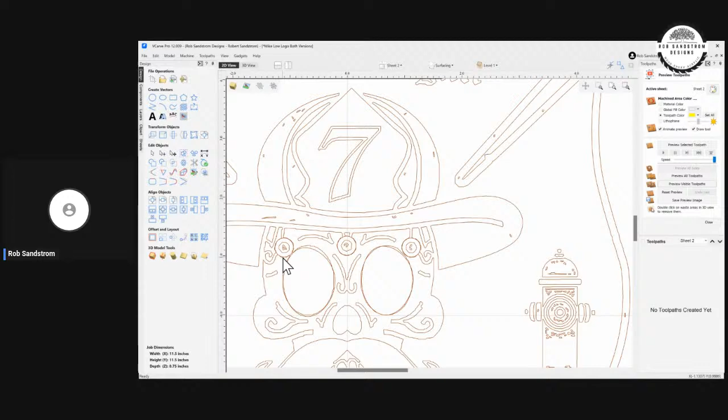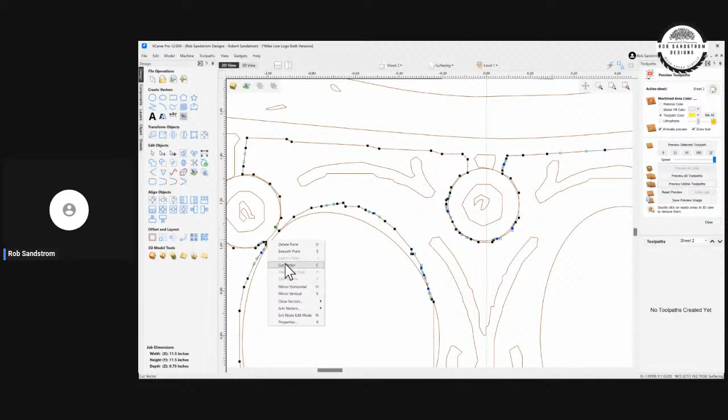But notice it deleted other vectors up here, so I would have to clean those up first because these are accidentally connected. So this one I can delete. This one I can't delete. So what I have to do is hit node, because it accidentally connected them. So here I'm going to hit cut that vector, cut this vector, go out of node mode, and now I can hit delete, and I've gotten rid of that one.

So I would just systematically go through here and delete all those, and then I would turn around and clean up all of these individual vectors. And it's just working through this process, and sometimes it can take a couple hours to get through all of that. Does that help, Kevin?